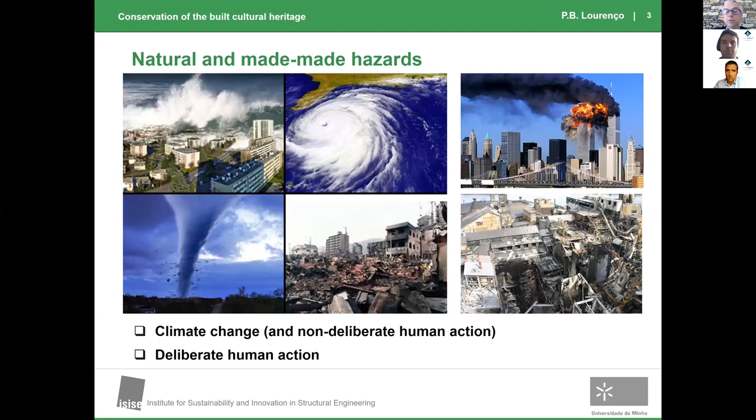I always understand myself as a technical expert, as an engineer. Engineers tend to have extremely good skills in using assessment and diagnosis tools. They have far less skills normally in involving society and transmitting the idea of risk we are subjected to. And they are also less good in defining solutions and implementation plans, and this has to be done with the society.

I'll be talking about earthquakes. Earthquakes is not the most costly disaster, but it's the one that is killing more people in the world. About 40% of deaths from natural disasters are resulting from earthquakes. And if you also note that more than half of these deaths are coming from masonry buildings, and that most of our built heritage is unreinforced masonry, traditional old buildings, then you can see that I'll be talking about the most recurrent typology and the most killing typology in the world due to a natural disaster.

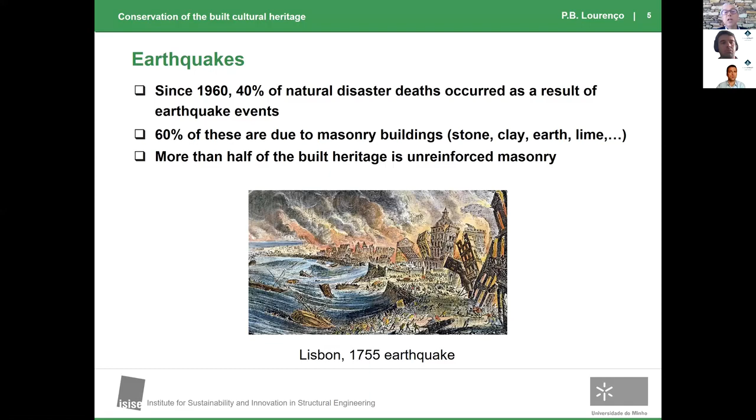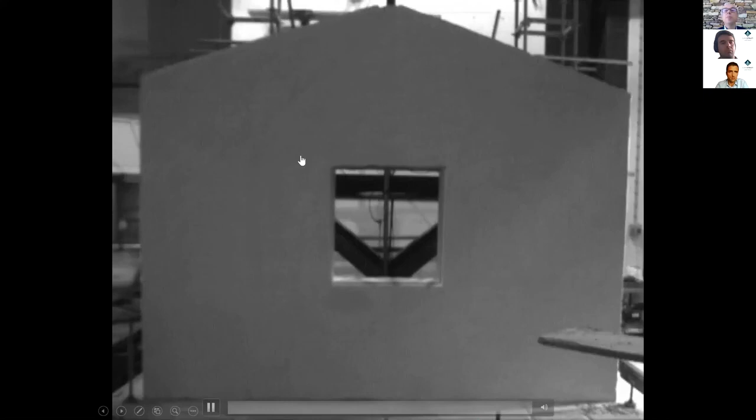Now, I would like to contribute to make structures safer. I'm going to show you two shaking table tests. Both of them are in the largest shaking table in Portugal, in Lisbon, in the National Lab, this one involving the University of Porto. This is just a facade with two return walls, subjected to an earthquake normal to the main facade. And you can see that with such a brittle material and a weak bond, in the end you have nothing - you kill the people inside, you kill the people outside in the street, and you lose all property.

Now, cultural heritage buildings are rather vulnerable because they were not designed for extreme events. They are normally heavy, very weakly connected, and made with materials with very low tensile strength.

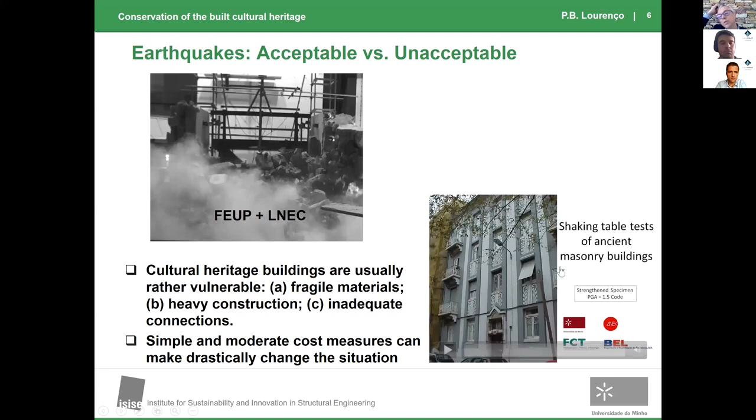Now, we can make it much better. This is a test that we did also in the shaking table. It's a little bit loud, but I think you can hear the noise of the earthquake. You can see one pier collapsing out of plane - it's a very nice image because you can see the movement in plane, and the amplification of the higher modes out of plane in the upper part of the building. Now, this is a strengthened building where the only thing we did was connect the floors with the walls. We connect an external steel plate and tie the joists of the timber floor, and we connect on the sides, because there is a neighbor, using a steel angle. By doing this, a very inexpensive operation, we increase the resistance of the building by more than 50%.

So if you want to make this building safer, I always say there's basically 3 solutions, and the solution is connect, connect, and connect. We have to be sure that we have all the building parts connected.

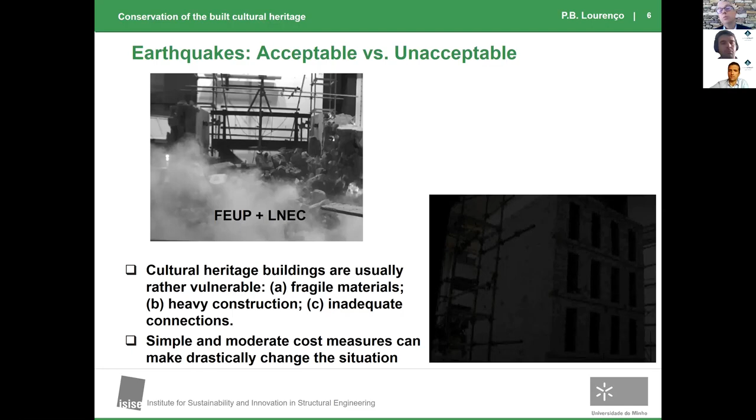Now, when we talk about cultural heritage, we're talking about buildings that have some value for society. There are many aspects about value and significance, but maybe these are two of the most important ones. One is identity - why we define ourselves as a citizen of a certain part of the world. So I normally say that we are what we build, and the building heritage is part of our past.

If you have no past, you have no future. There's a lot of pressure for society to keep these buildings. The second point is economy.

Tourism is a major part of the wealth of the world and of Europe. We have 10% of the wealth of Europe due to tourism. Portugal is a very small country, smaller than more than 50 other countries or cities in the world, yet we receive twice our population as tourists per year. Portugal is in the top 10 of world tourist destinations, receiving more than 20 million tourists per year. So Portugal and many countries in Europe would have a very difficult time without the money from tourism.

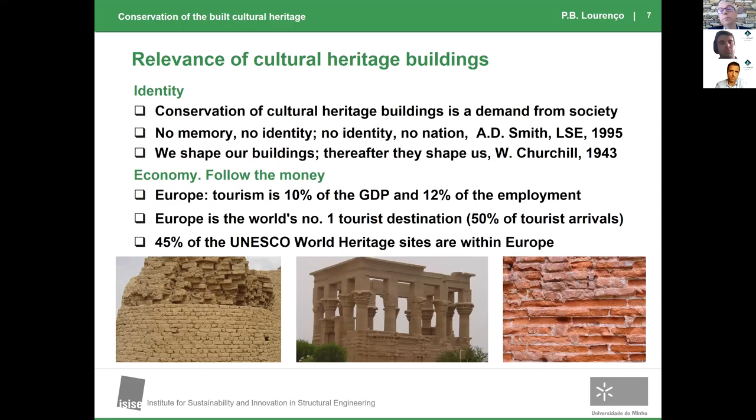Now, having understood some of the problems we have with cultural heritage, and the significance and importance of it, let's go very briefly into how we handle this problem.

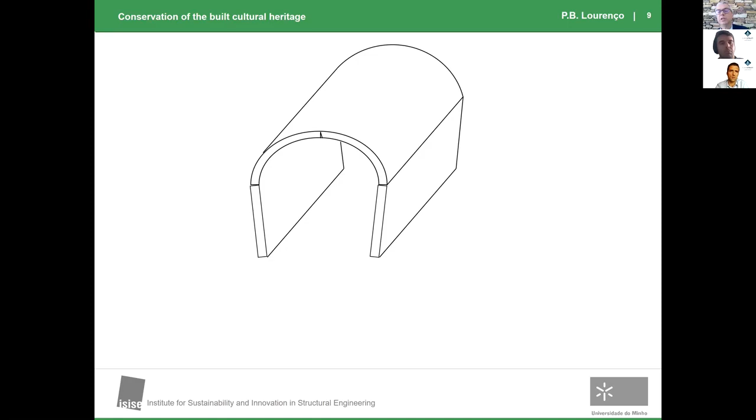Imagine we have this very simple building, two walls and a barrel vault. A barrel vault, to keep its shape, needs horizontal forces, thrusts in the supports, otherwise it becomes flat as a sheet of paper. These thrusts have to go to the walls and then to the foundations. If the walls are too weak, they will open up, and then there will be cracks in the system.

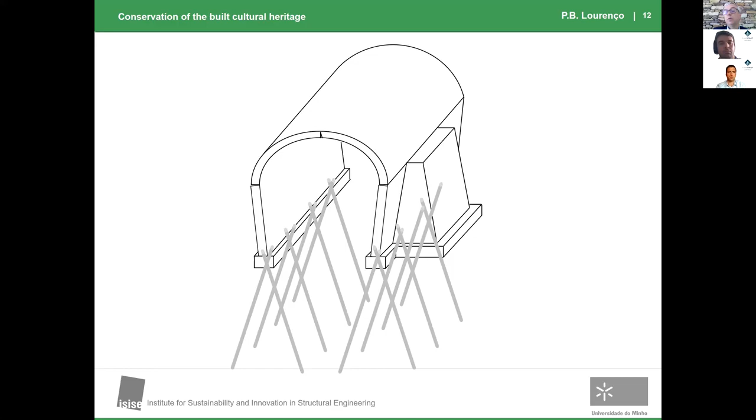So what can you do? You can add buttresses—these are very ugly when designed by an engineer, but we can make them beautiful. You can add foundations; the foundations are always terrible, most of the time very weak, and a lot of the time there are none at all, so they're very different from what we do today. You can bring the weight of the building down to deeper strata for better quality soil and more stability. You can understand that the building is intrinsically weak, too slender, and needs to be made stronger. And you can do all of this together.

The message I'd like to tell you today is, if you forget everything else I said, don't forget this picture. This is what we do not want to do. This is destruction of the built cultural heritage, and it's totally in opposition to the methodology we try to apply today to these buildings.

So typically the methodology is: do nothing, maybe just monitoring, and you check if there's progressive damage. Maybe you install a very simple strengthening or stabilization system, like a tie, and even monitor that system to see if you need something else in the long term.

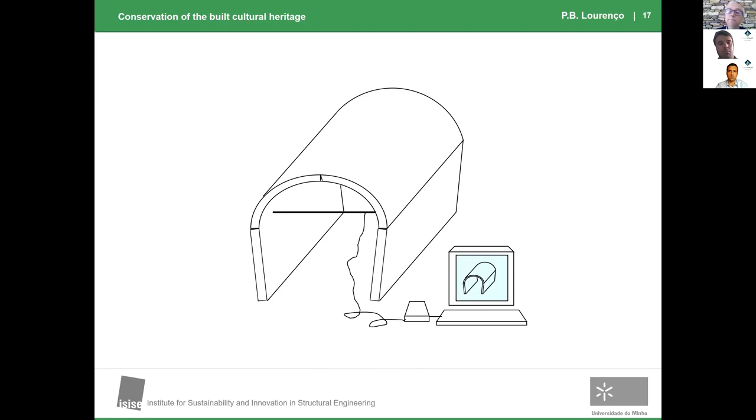So we have these two opposing views. The old view is to mistrust or distrust anything that already exists—I want something new, I only believe in new materials and not in existing structural components. The modern approach is to do as little as possible: adopt an incremental, minimally intrusive approach, ideally reversible, and just do what you need. The best optimization involves fewer resources and is less harmful to the cultural heritage value.

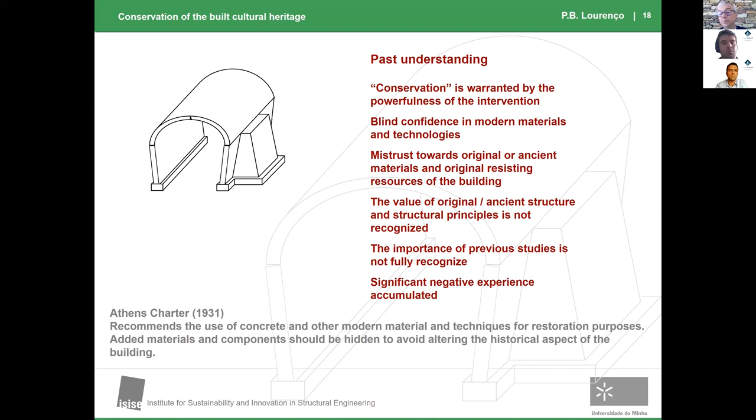Now, this is an extremely young field of science. If you think about civilization, we're talking about 10,000 years old. By the first quarter of the last century, people believed in things we don't believe anymore, like using materials that weren't proven in terms of durability or compatibility, or believing that new materials and additions to the structure should be hidden. Only 30 years later—a microsecond in the story of civilization or built heritage—we changed our minds totally. Now we'd like to use traditional materials and techniques if we want, but we should be able to distinguish what we make today from what was already there.

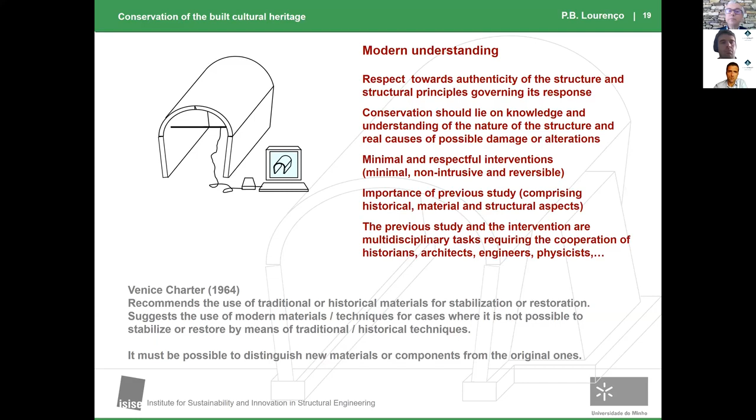So there's still much to do. Normally what I say in a simple way is that we are doctors of the built heritage, and we'd like to approach the procedure very similar to medicine. We try to reconstitute the history of the building, make the necessary exams like a doctor does, make a diagnosis—if there's no diagnosis, there's no therapy—and then make the therapy once you have the diagnosis. Most of us would be very happy if the doctor says you're fine, you need nothing at all.

I think all of us would still be fine if the doctor said, you need to take this pill. But if the doctor says, I'm going to do this very complicated surgery, maybe 50% of the people die from this surgery, I think all of us would like a second opinion. So we believe the building is entitled to a second opinion if you want to make a massive intervention.

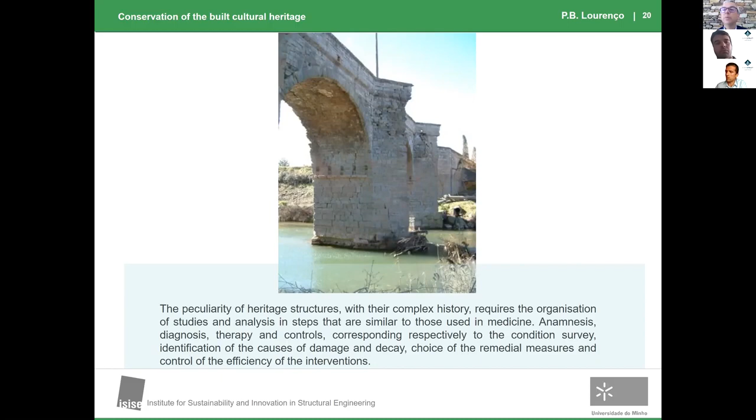And the final comparison point, which is very important, is about control. Going back to the building - the doctor will tell you, come back in 6 months, 1 year, 2 years, we'll do new exams. So we'd like to go back to the building and monitor it as a patient.

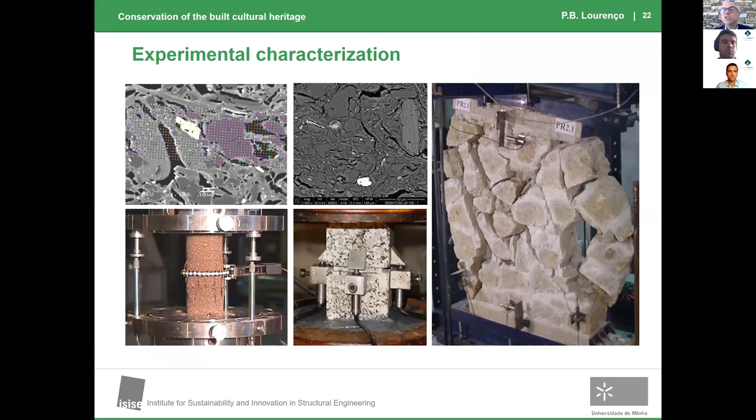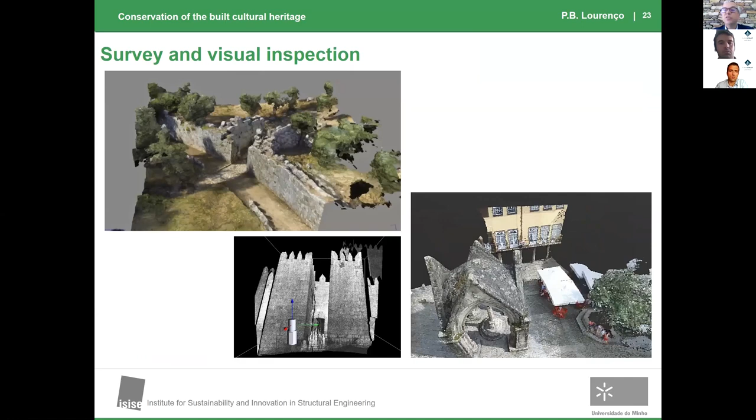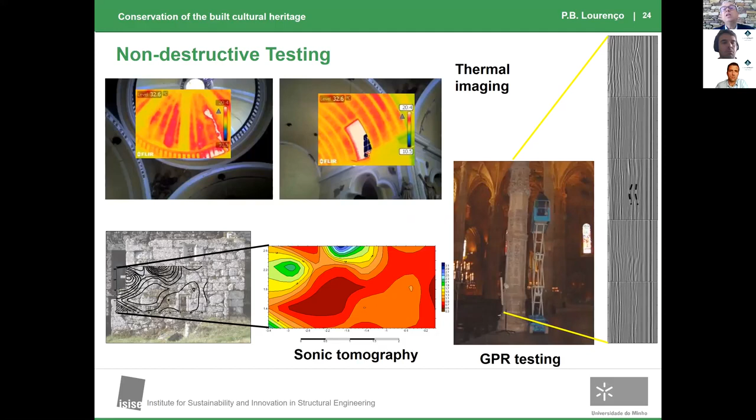Research in this field is today as advanced as any other field in civil engineering. It was underdeveloped for a long time, but today we're able to do everything like we do for concrete, for steel, for modern materials. We have characterization at all scales, and very exciting new techniques similar to those in medicine - we use different principles to see what cannot be seen, hear what cannot be heard, measure vibrations we cannot feel. So we have exciting new tools that allow us to do almost anything.

Also from the computational point of view, we've moved from models that would take 1 year to make for a full building, to amazing things today where my students in 3 months are able to model a full building and do nonlinear pushover and nonlinear dynamic analysis. So we have the tools to do it fast, both from the modeling and the analysis point of view.

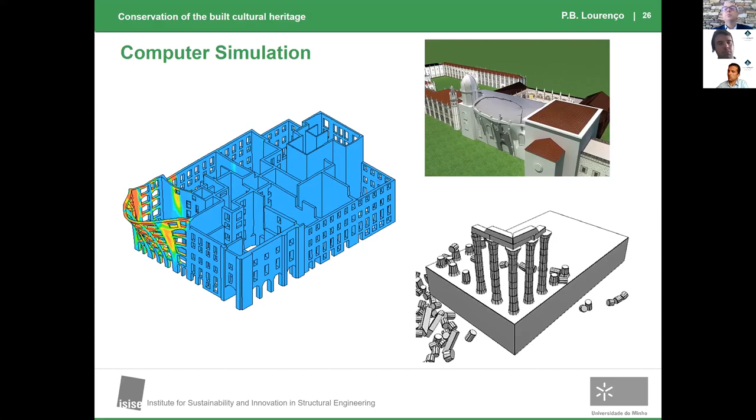Now I'm going to show you some examples of what we've been doing. I'm extremely happy that we're able to combine high-level research with engineering. I think that's fundamental in modern academia - we cannot have only professors with no link to engineering practice and the engineering world. And I'm very happy that we are able to do it.

This is one of the most exciting buildings I've worked on, which is not masonry, but I couldn't resist putting it here. It was masonry, then there was a fire, a revolution, and an earthquake, and we lost the building. Then they built it again. Then there was another earthquake, and they lost it again.

They said, well, masonry is no good, so let's make it in timber. Then there was timber deterioration, another earthquake, and they lost it again. Finally, they decided to make it in steel. So we have a Gothic or neo-Gothic building, which is modern and made of steel, replicating and mimicking a building of the 15th, 14th, or 16th century, which is very unusual.

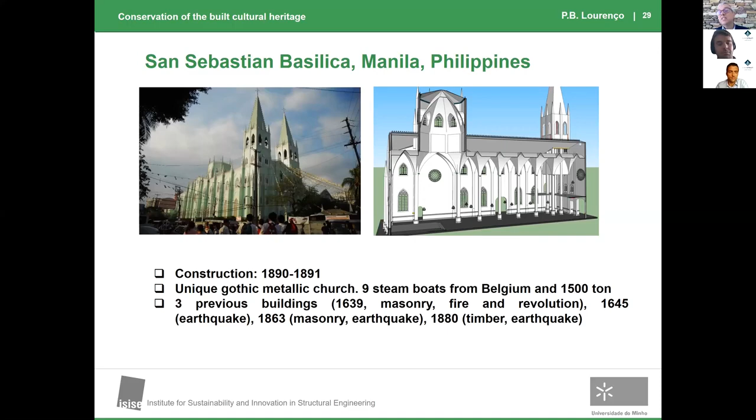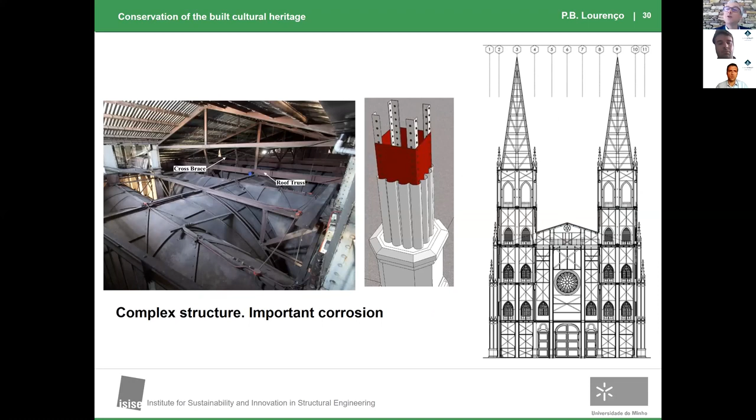It's also a story of structural failure - we had already 3 failures with the building. Now the problem is that metals suffer corrosion, and there's important corrosion in the building, and we'd like not to have a 4th failure.

So what we did was, of course, inspection of the building and in situ testing. I like this image because it tells us the complexities - a model is a product of our imagination. If you don't validate the model, its reliability is 0, it's meaningless.

So you can see here that we started with model 1. Then we did many trials, which actually cost a few months, until we were happy with our model, which was model number 5, and we significantly increased the size and the elements we brought into the structural model.

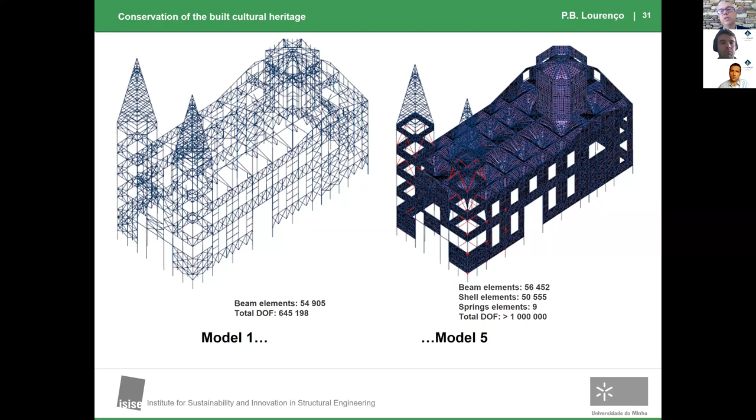This is typical of existing heritage, where the structure and the non-structural components are not as separate as in modern buildings. We then did a typical structural analysis showing that the building is okay, but you need to stop corrosion, otherwise it will not be okay in the future.

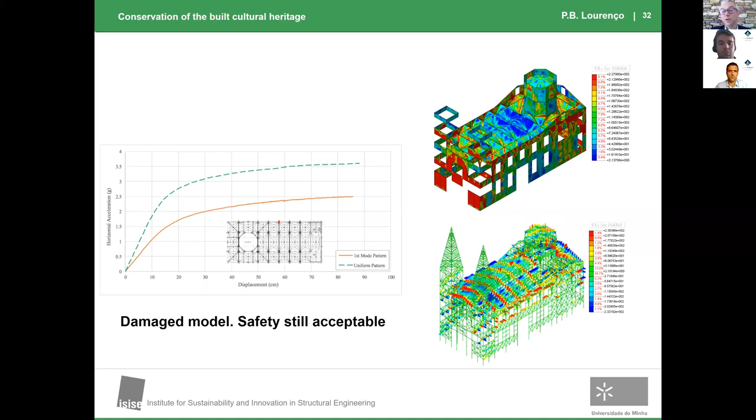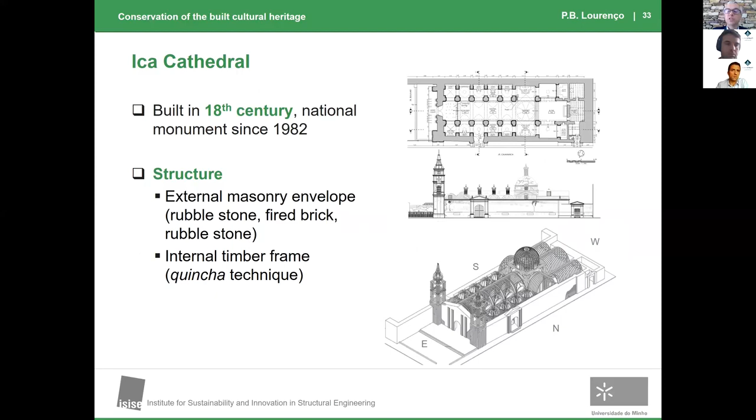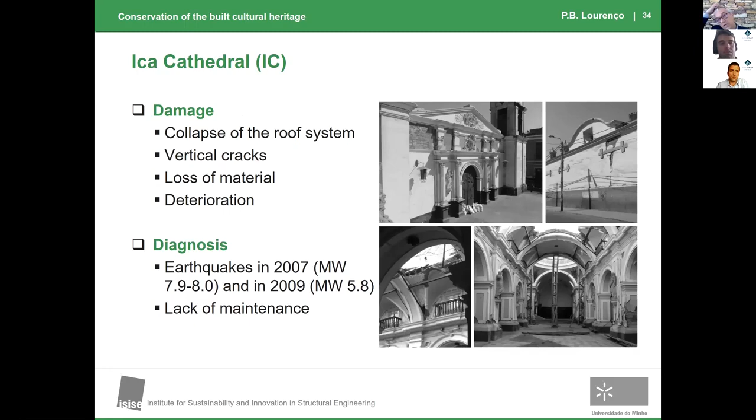Second example of using these tools: a hyper-complex building in Peru, which is a mix of masonry, adobe or earth construction, and timber structure all combined together. It suffered two earthquakes and is heavily damaged. Reconstruction is expected to start next year. We were involved in assessing the safety and designing the strengthening system, trying to do it using traditional techniques. I won't go into detail.

I'd like to tell you something fundamental from the engineering point of view. I had a meeting with the local community, local engineers, and local authorities, where they said, we don't want this building anymore, we want a reinforced concrete building because we're afraid it's going to collapse. They made a very important statement: why should we be forced to use a building which has less safety than a modern building, and face a higher probability of failure? I think that's a very important question society is allowed to ask, and we shouldn't accept that the level of risk is much higher than a modern building.

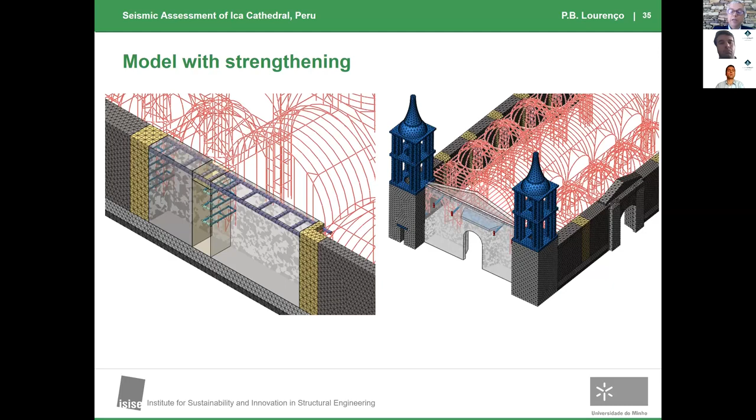Of course, you can reduce the number of people inside, or remove elements to reduce the exposure. But what we tried to do was convince them that with a new intervention, the building would have a comparable level of safety to a modern building. I believe we're able to do it by using adequate tools for the strengthening model.

Now a couple of examples, I know I only have five minutes but I think I'll be more or less on time, about other possibilities we use, not at the building level, but at the structural level. When you study a monument or an important building, we're allowed to use very sophisticated tools. When we're looking at a city or the world, the tools have to be different.

I don't care if I predict the behavior of a single building wrong, that's not relevant. What I want to address is the building stock on average and understand the global behavior of a building stock. So I use very, very simple tools.

And what can I do? I can use tools that allow me, for example, to know if there is a seismic event with a given intensity, how many buildings will collapse, how many we cannot use, how many people will be dead, and how many people will be homeless.

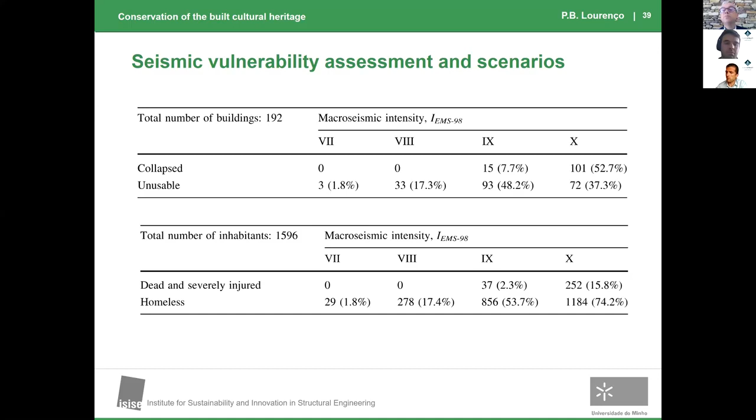This is fundamental for civil protection and for being prepared, because I need to know how many tents I need for temporary housing, how many hospitals, how many beds, and we're able to give this information immediately once you have a disaster. We can make these scenarios and help civil protection decide how much is needed in case of a disaster.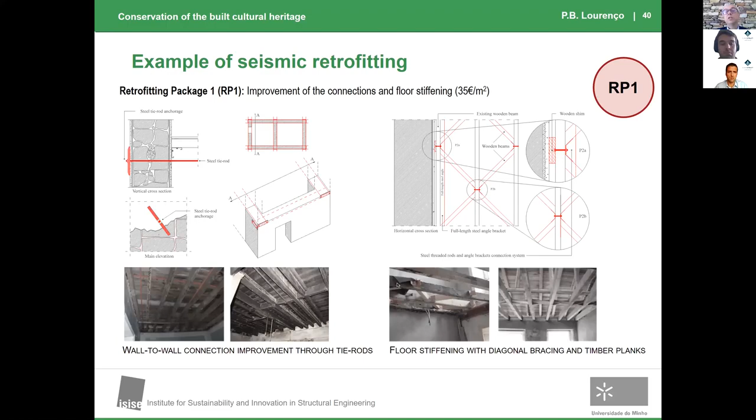We're also able to tell you if you use different strengthening tools, for example stiffening or connecting walls to walls with ties, what the influence is. So I have scenarios where, given a vulnerability in the building stock, by introducing a certain strengthening combination, I can reduce this vulnerability.

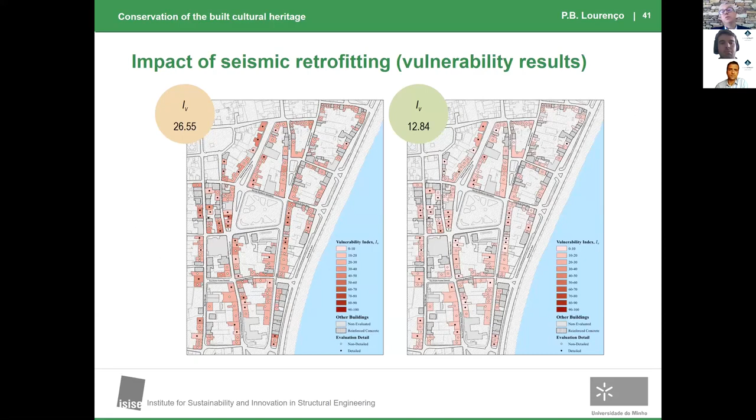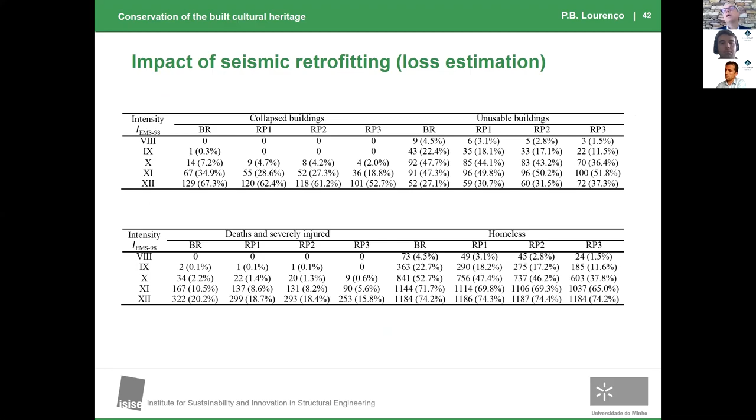I can tell you exactly, on average, how many fewer people will be killed, how many fewer buildings will collapse, how many fewer beds you'll need. I can even tell you if an investment is profitable or not.

And that's fine, I don't think as a society an investment has to be profitable. We may assume we're going to lose money but we're going to save lives. Or we can take the alternative decision and say this is not economically viable. It's a decision, but if you have no information, you cannot make this decision.

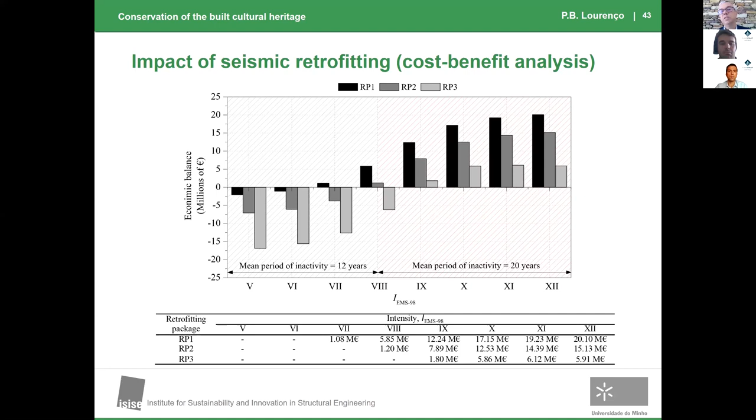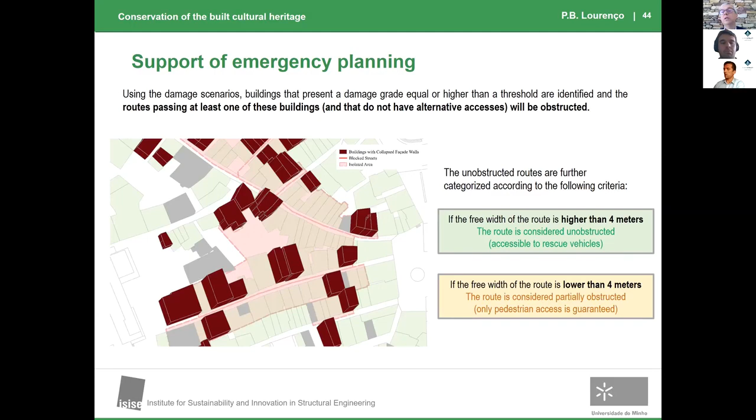We can also do this, which is essential: support emergency planning. If you have a disaster, you need to be sure firemen can go in, ambulances can go in, people can go out. If everything is blocked, not only are people killed immediately, but people are killed afterwards because you cannot provide any help.

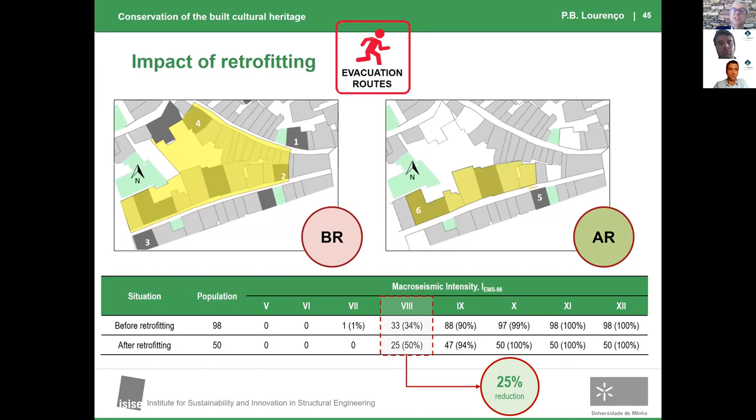So you can do, for example, selective interventions, and be sure that this yellow area, which is fully blocked, by acting with far less money, will have sufficient evacuation routes for people to use. These are some of the activities we've been doing at this territorial level.

I will finish with several fast provocative statements. Today, everything is about digital. This is a terrible and nice

web conference. It's very nice that we have these amazing communication tools, but nothing will replace the coffee breaks or the dinners or having contact, physical contact. But the future is digital, and this we cannot avoid. So there's many things we can do.

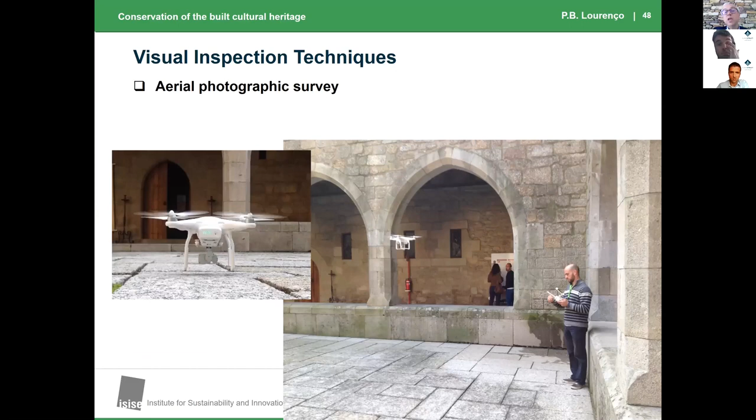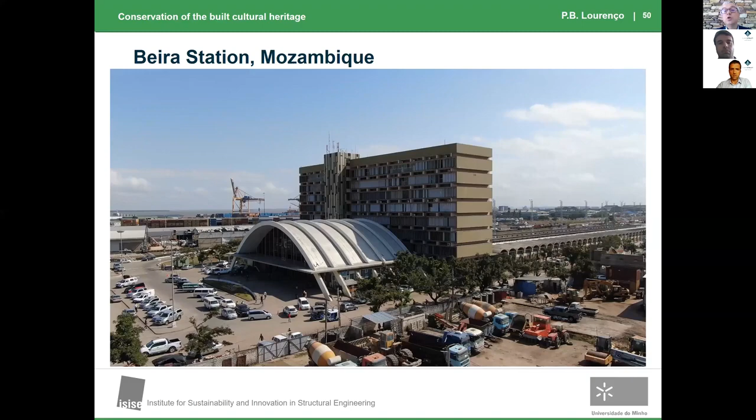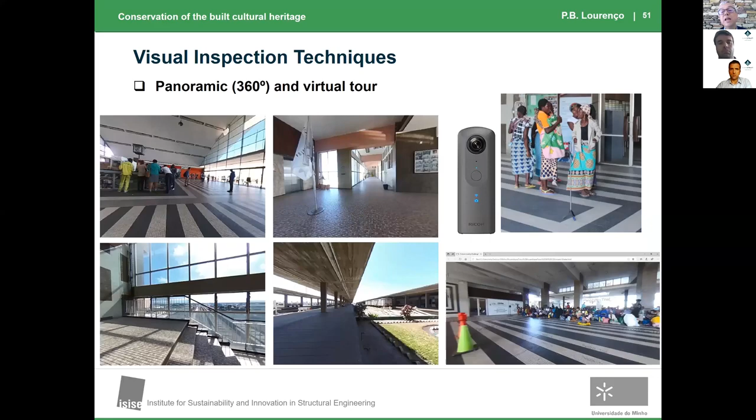I can also use these amazing 360 cameras that we take every time, because then I can see things in my office as if I've been there. I don't believe you can do inspection from far away, but I can then look more carefully in my office by using these amazing, inexpensive tools.

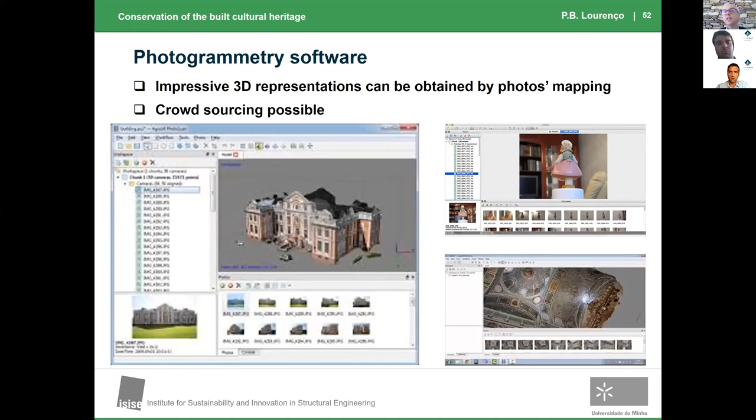I can even build models in a very cheap, easy way by putting this all together. I can even use photos, crowdsourcing from different people from the internet to have a 3D model without being concerned anymore so much about calibration and other things, right? Quality of pictures, etc.

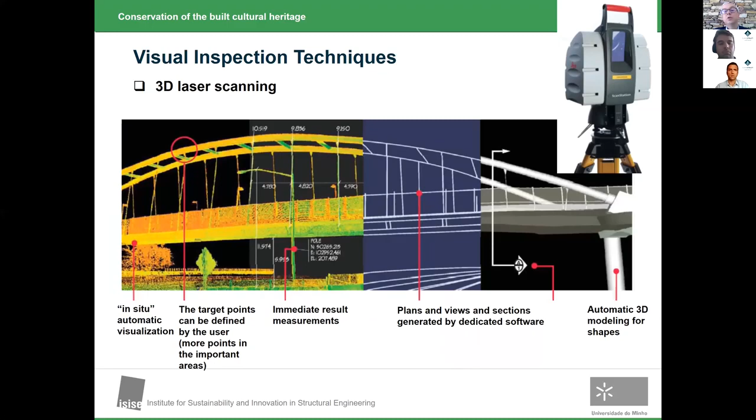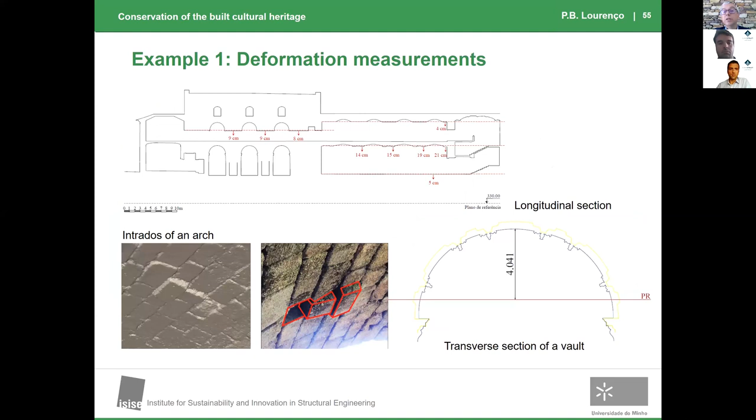And I can use tools that bring this virtual model, for example, as a point cloud to something physical. And then I can do things like this, for example, obtain ortho photos and plans and use them to map. This is very important. Use them to find deformation and movements in the building.

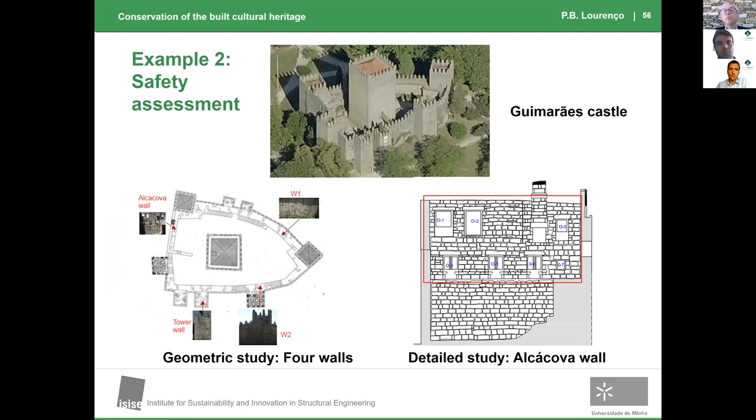I show you here very interesting, I think, safety assessment of the Guimarães Castle. And here what we did was to use laser scan, combining the depth of the scan with intensity. And we were able to obtain, for example, automatically what is the size of each stone.

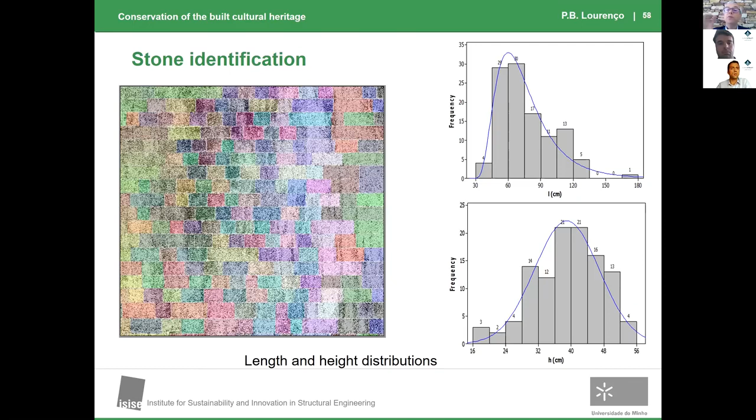Then we put it in our numerical model, and I can tell you the safety by using a very simple model, either discretizing all stone, which I don't want to do, or using something homogeneous where I put the geometry in another simple way. Okay.

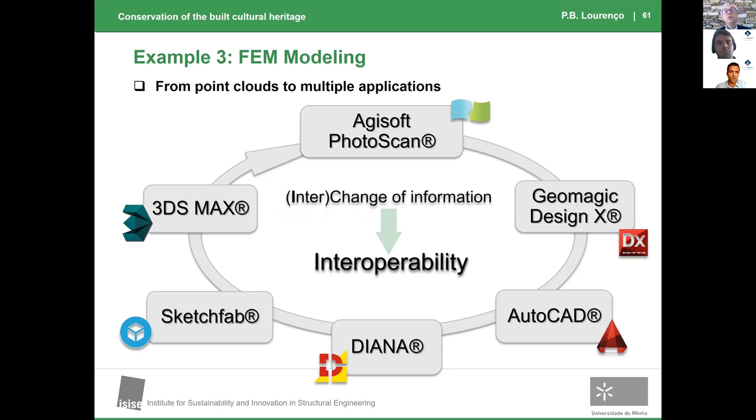Another example of using these tools, trying to make them interoperable, that you can operate all of them together, different softwares made together, and would like to have the real object, a cloud of points, and automatically almost a sort of structural analysis, simple, that we can make.

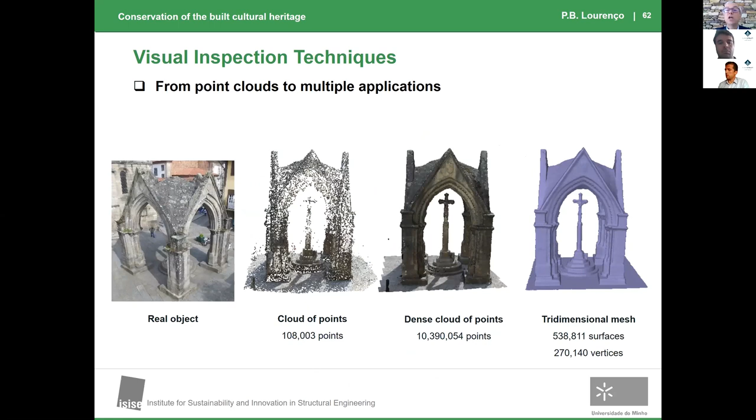This will never replace the engineer. The engineer remains fundamental because the experience cannot be replaced by a computer yet, but it's something that will make our life easier. Another thing which I think is very, very important is using geographic data.

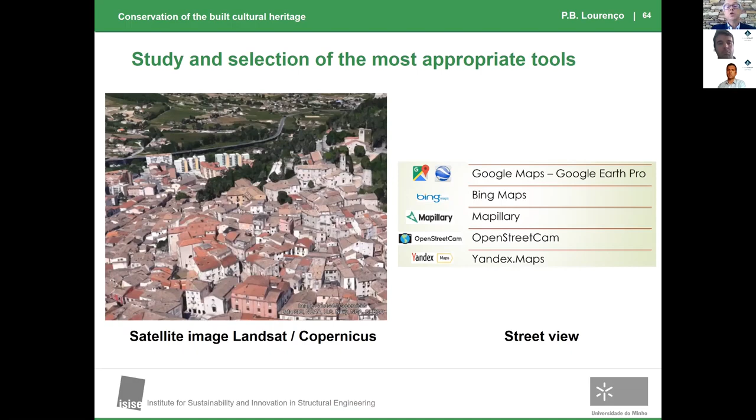Here I show an example of the tool I showed you before at territorial level by using free software available in the net. And so we try to use, instead of sending people, teams to a city center, historic city center, in this case, different tools available in the internet.

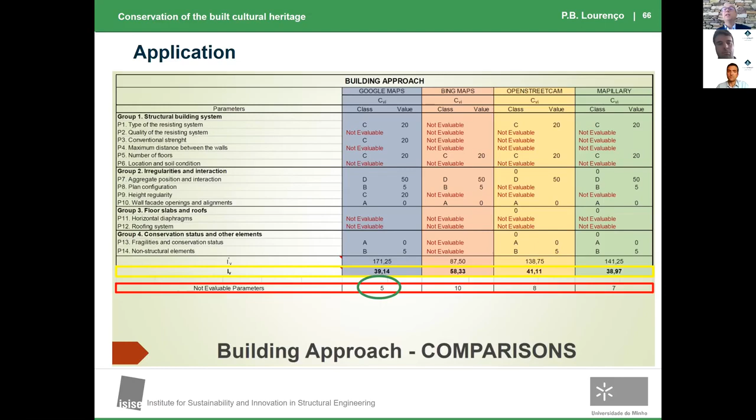We made a comparison, what you can get, you cannot get. Of course, there's always better you can do physically, but there's many things you can get from a tool that is based on remote sensing.

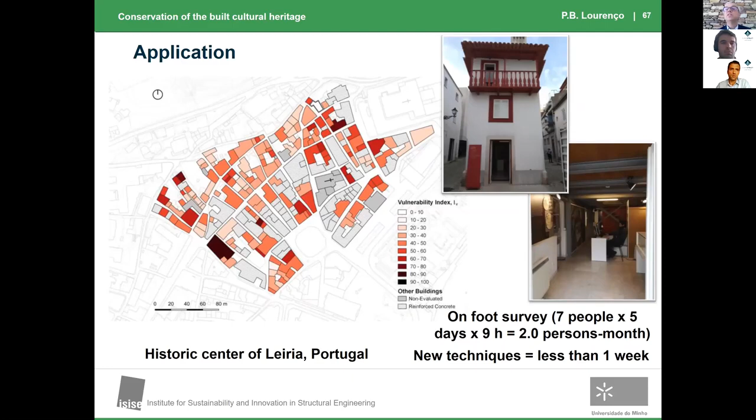And you can see here the difference where I compare a 1 week work with 2-person month work. Okay, I'm not saying the quality is the same, but I'm saying this is also the way to go, at least in the first screening.

Then in situ testing, monitoring, damage detection, there's many tools we can use today. Now, for example, the use of dynamic identification and ambient vibration tests is very cheap, very easy to apply. I show you here an example of a damaged tower, and we measure the tower before and after. You can see the huge impact, for example, in the change of frequencies.

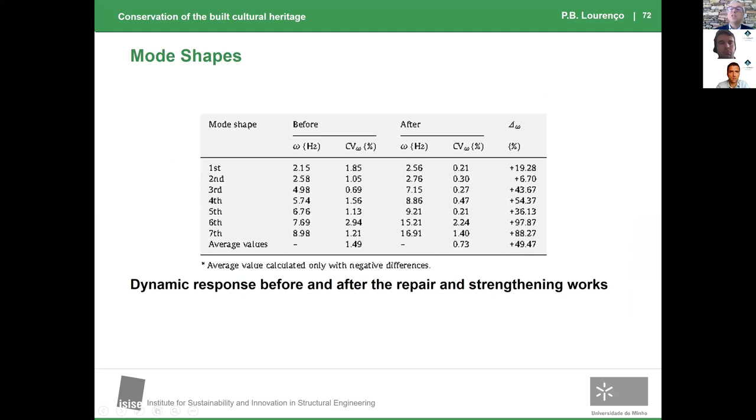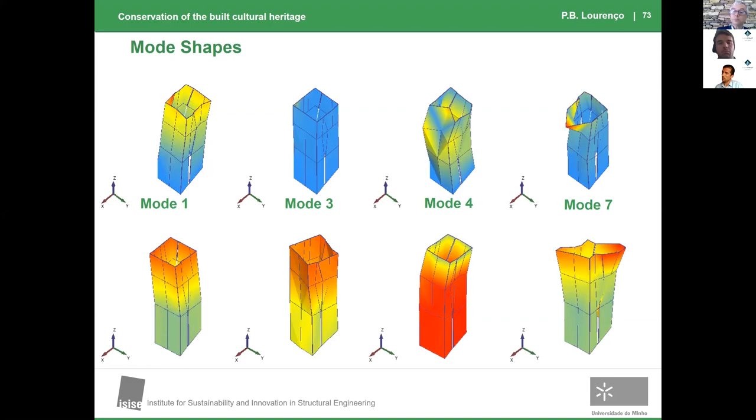So these tools can assess the global behavior of the building, can provide us with amazing information. They are now very inexpensive to use and relatively easy to install in a building and to use them to monitor the structure health.

Okay, I think this is the final pictures I'm going to show you. We had a very nice project funded by the Interreg program on preventive conservation. Why do we believe that we have to go to the doctor, and our car has to go to the doctor, but our buildings don't have to go to the doctor? That's a very strange thing, but this is reality.

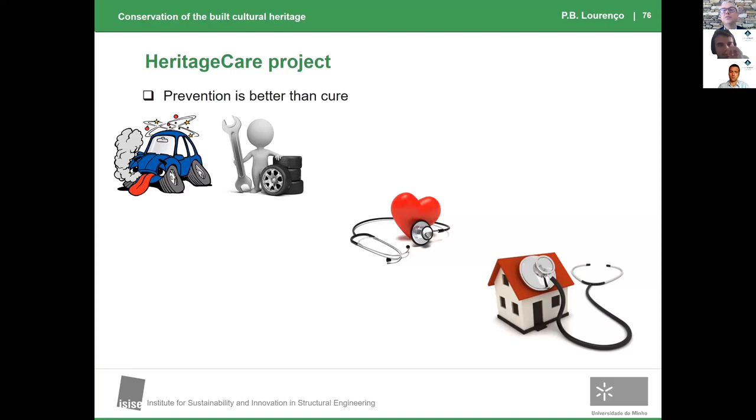So we developed a methodology to be used in the long term for cultural heritage buildings via some non-profit associations that have 3 service levels: one very simple with basically yearly inspections, one more complicated that involves monitoring and a more detailed survey, and another super complicated integrating a BIM with a historic building.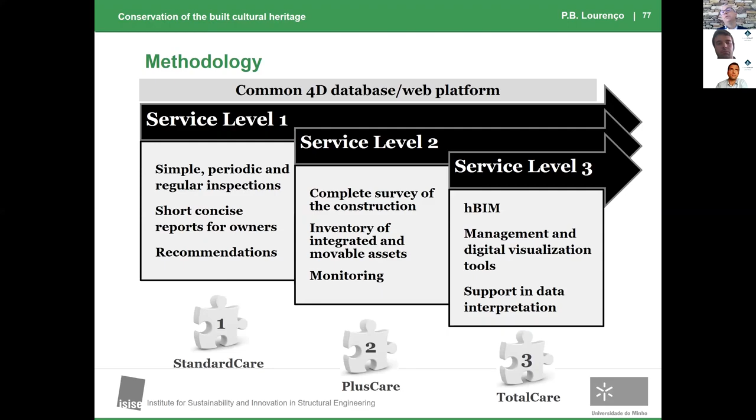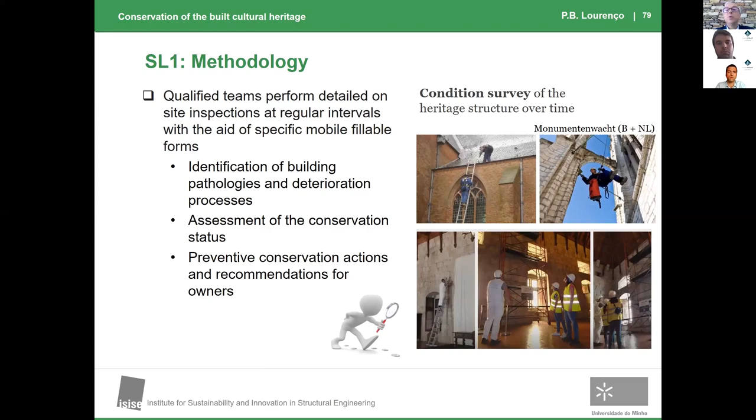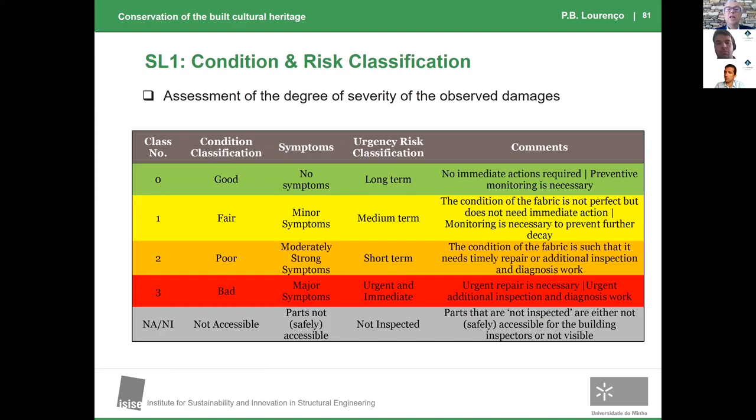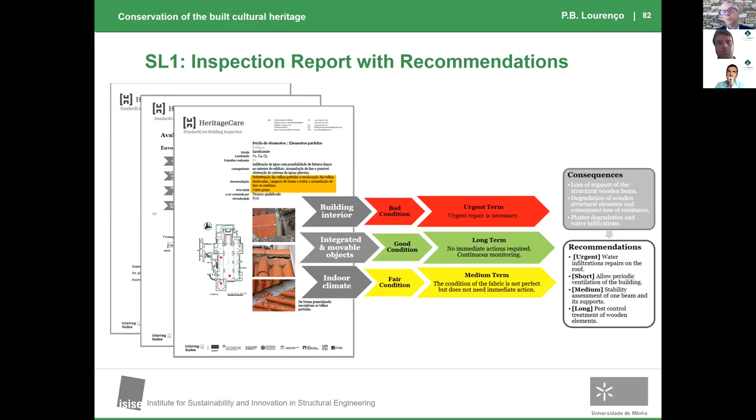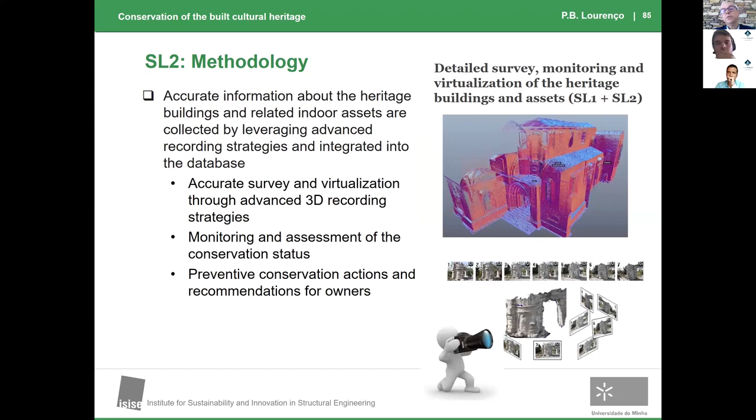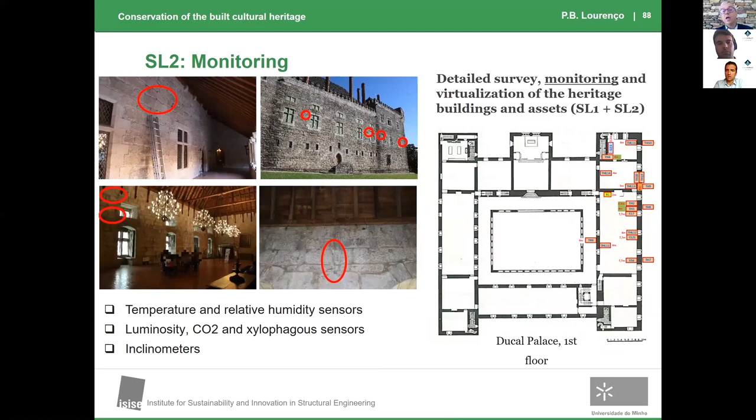Then you can do a little bit more detail, and you can already have monitoring for the building. This is the Ducal Palace of Guimarães, where we had a more sophisticated survey. Then we had monitoring of the building, providing closer observation of the structural health of the building, and we can go for full integration using a building information modeling approach, which here we also have for this building, where everything is integrated into a unique virtual model.

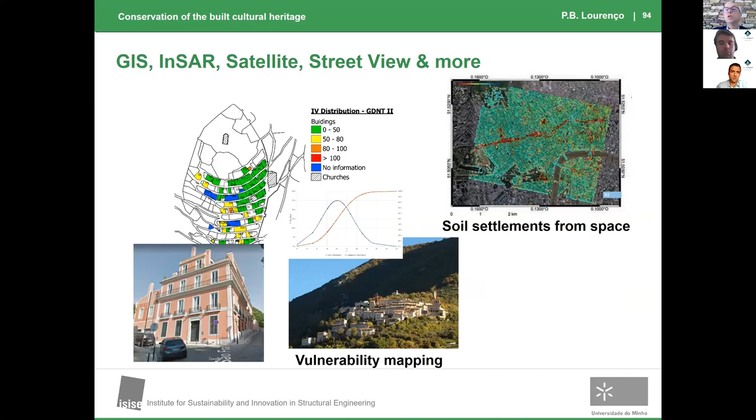Okay, now needs and directions in the digital world. There's amazing things we'll be able to do, and we are already doing—for example, for vulnerability mapping, for soil settlements, all of it using satellite imaging, using street views, and more digital tools. I believe strongly this will change the way we'll assess risk at a very large level.

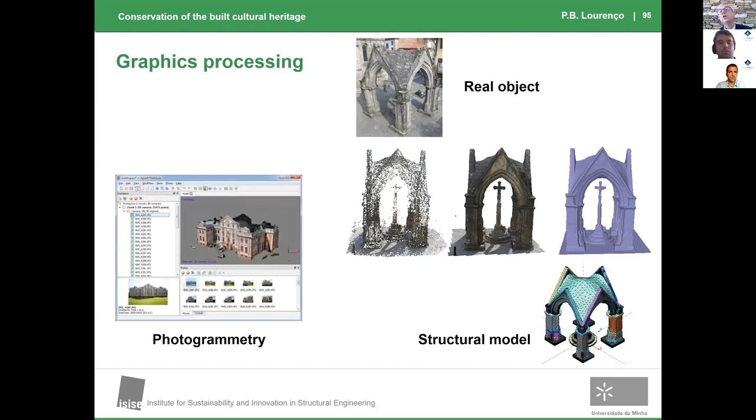There's still much we have to do in graphics processing. Things are getting amazing. We still have problems in speed, in the need for very fast computers and very good graphical cards. And then we have the problem that what you see is not really what you have, so we have to combine what you see with additional tools to have a structural model that makes sense.

Now, the more we have, the more crazy we do. So we are now moving to analyze multi-million models, and as you can see here, crazy stuff. We are doing huge models at a small level and huge models at a large level, where we try to address very complicated models. There's still a lot we have to do in having adequate constitutive models and adequate hardware tools.

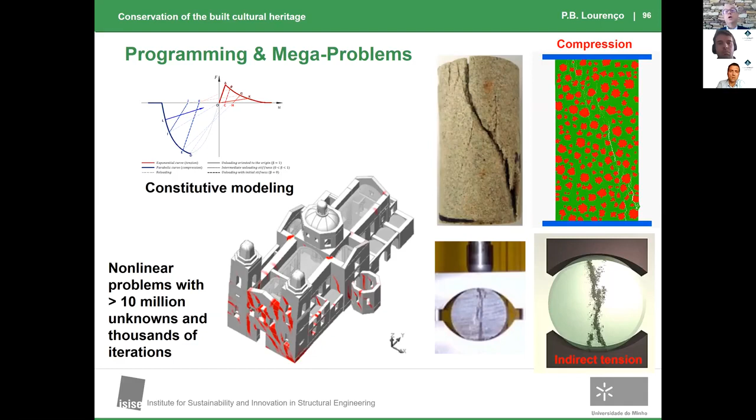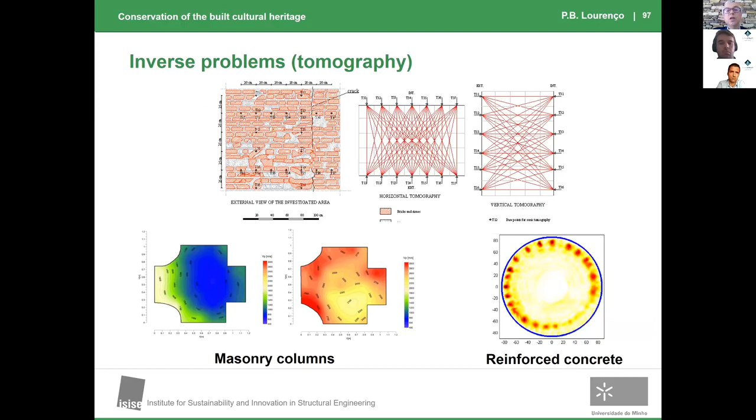Also, inverse problems are a key issue. It's a very difficult nonlinear problem. These are examples of tomography, and this also means model updating based on information that you measure from the building, which is a key issue for the future. So there's many things we will be using in the next years, exciting buzzwords of today.

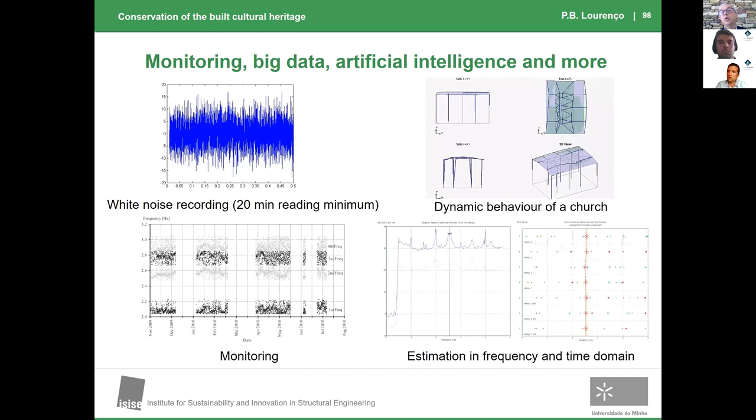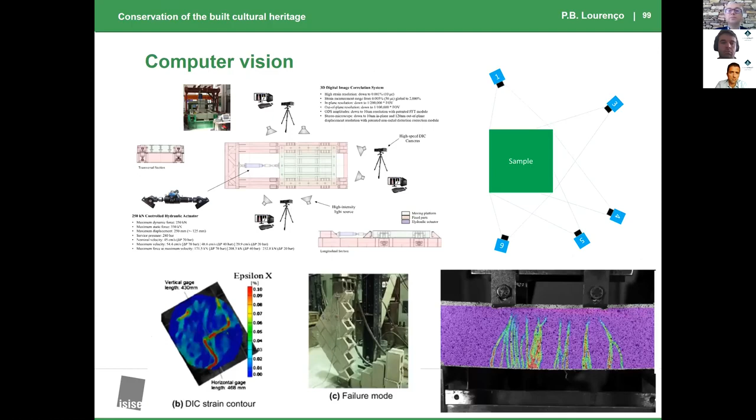They will be used in structural engineering for sure, all these tools. Also computer vision—it's an exciting new world. This is the new shaking table that will be available at the University of Minho, with a unique 6-camera single model, a 3D view of a model using 6 cameras independently and combining a DIC model in real time in the computer. And this is the end.

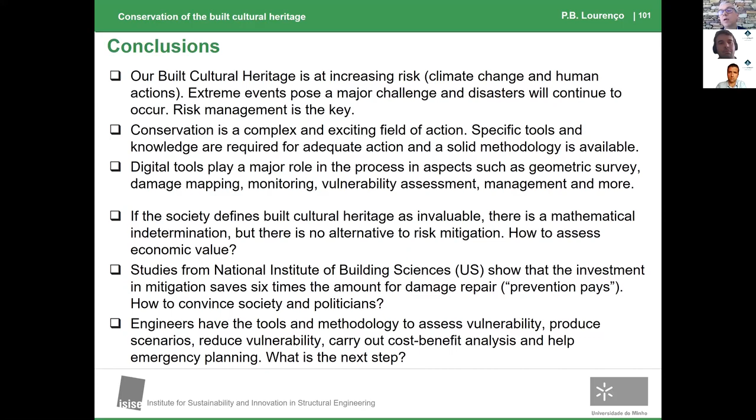I put you here from the National Institute of Building Sciences. €1 saves €6 - that's very simple to say, but the society doesn't believe us. Then, the other point, which I think applies as a whole for EuroStruct and for the engineering community, is that the amount of knowledge we have today is amazing. I think we know so much. The question is, how can we bring this to a safer society and more reliable risk management in the field of cultural heritage buildings? So thank you very much for your attention.

Thank you, Paulo. It was indeed a very interesting and challenging talk.